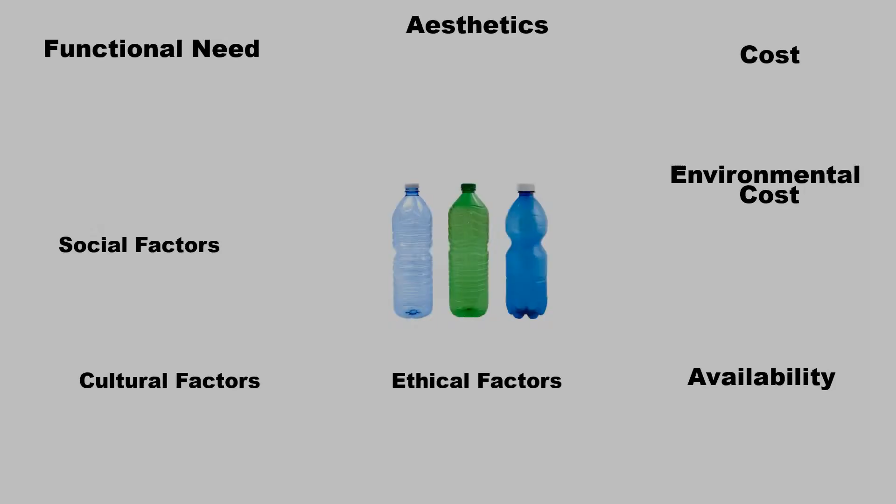PET, or polyethylene terephthalate, is used for making most plastic bottles. Functional need. PET is tough and durable, lightweight, and transportable, food safe, impermeable to water, and it is ideal for storing drinks that require high pressure, as well as those that do not.

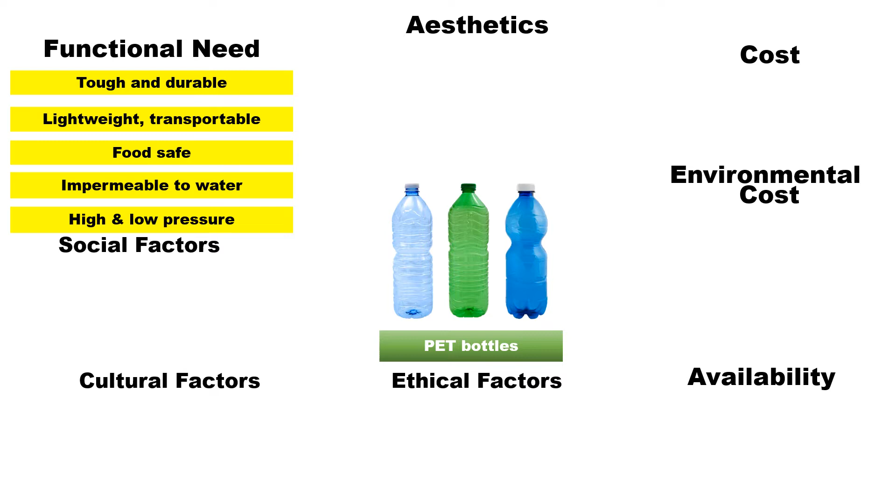Aesthetics. PET bottles can be blow molded into different bottle forms. They display the name of the product well, and they are transparent and can be colored to make them attractive to the eye. Cost. PET bottles are cheap to make because of the mechanized nature of the blow molding process, which keeps costs down. Although blow molding keeps costs down, in many cases, a PET bottle costs more than the drink they contain.

Environmental cost. PET bottles are recyclable, but many end up in landfill, and there is a high environmental cost because they contaminate water supplies as they release a substance known as leachate. Oceanic pollution leads to massive rubbish zones in oceans around the world. Plastic bottles and their tops are the third and fourth most collected plastics from the ocean. Availability. PET is available as granules, pellets, flakes, sheets.

Ethical factors. Polyethylene terephthalate bottles should be recycled to prevent oceanic pollution and leachate from landfill. PET bottles are made from crude oil, a finite resource that isn't likely to last for future generations. Social factors. Consumers use PET bottles for leisure and hydration. Bottled water is a modern phenomenon which is socially accepted.

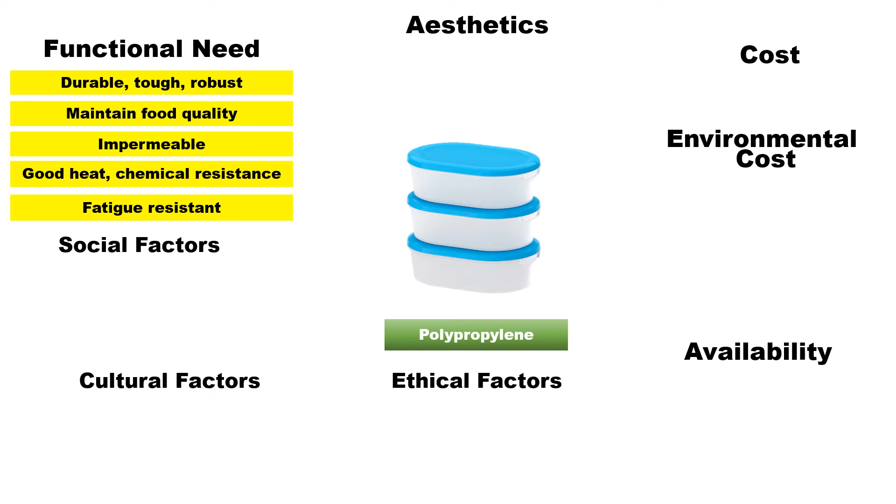Aesthetics. PP can be rough or smooth. It can be transparent or frosted. Color can be added to give it an attractive look. Cost. PP is cheap to manufacture. Environmental cost. PP can be recycled, but if disposed of in a landfill, it can produce leachate, which leaks into water supplies causing damage to habitats and stunting the growth of wildlife. It can end up in the oceans causing pollution if it isn't recycled or reused.

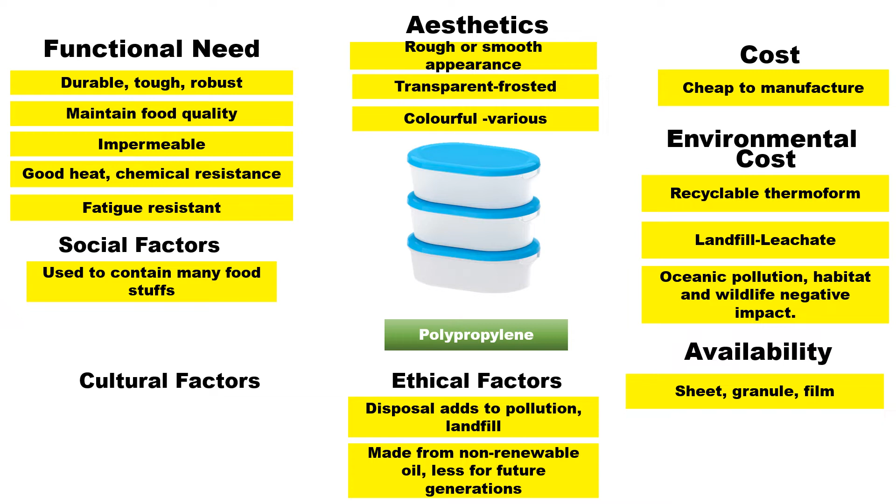Availability. PP is available in sheet, granule, pellets, powder and different sections of tubing. Ethical factors. Disposal of polypropylene adds to landfill. It is made from crude oil, which is a finite resource, and may not be available to future generations if it isn't managed. Social factors. PP is accepted socially as a food-safe polymer for storing food. Cultural factors. Unfortunately, using polypropylene contributes to the throwaway mindset.

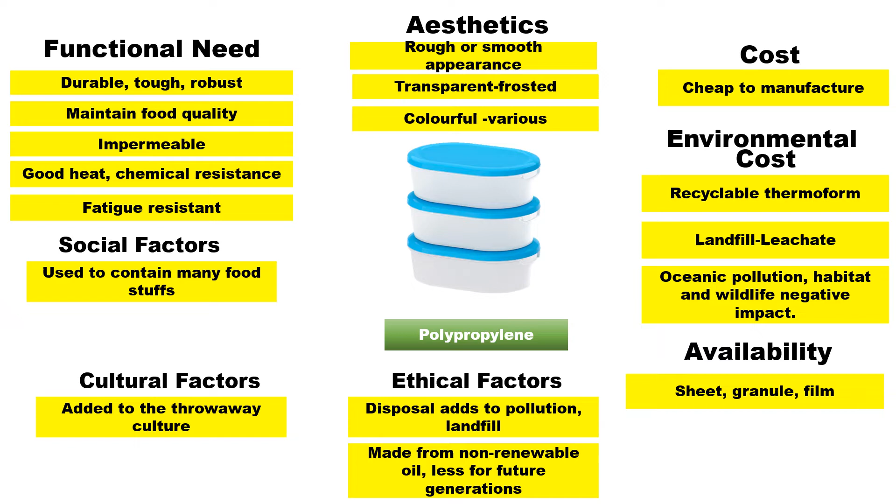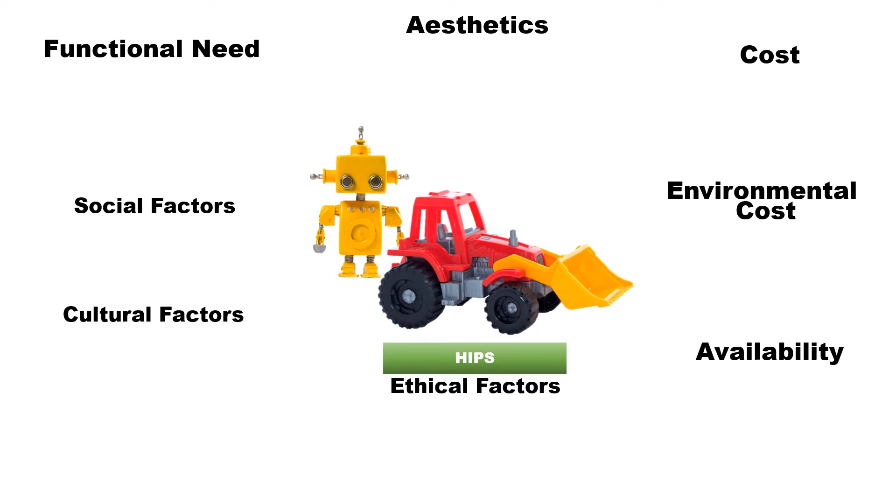Functional need. The selection of materials to make toys such as the robot and toy digger are wide and varied, but when it comes to selecting polymers, thermoforms are used. High-impact polystyrene, also known as HIPS, is a popular choice. It is tough, hard and rigid. It has good impact properties, and it is lightweight. Aesthetics. High-impact polystyrene is colorful, and pigments can be added. HIPS can be smooth or textured. It can be glossy, or have a matte finish.

Cost. HIPS is made from crude oil, which involves many processes before it is used to make a toy. This makes the initial cost higher than a timber-based toy. Toys made from polymers such as HIPS are cheap to make, especially when they are mass-produced. Bulk buying reduces the cost of the polymer.

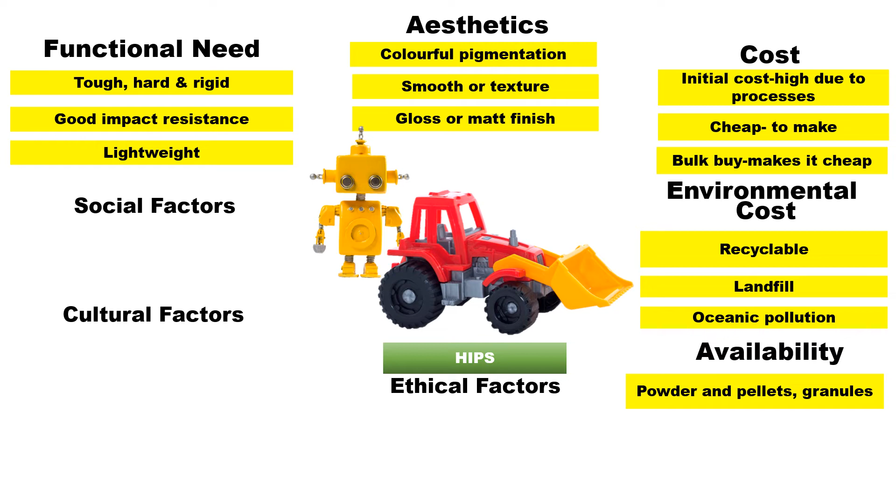Environmental cost. High-impact polystyrene is recyclable, and so it lessens the impact on the environment. A large amount of thermoforms are thrown away into landfill. This includes HIPS. Disposal of HIPS can add to oceanic pollution. Availability. HIPS is available in many forms including powder and pellets. Ethical factors. The use of HIPS leaves less crude oil for future generations.

Cultural factors. Character merchandising and mascots from films and sports events are possible because of the use of polymers such as HIPS. Breakfast cereal companies use free toys and collectible items to entice young consumers to be repeat buyers and to create brand loyalty. Social factors. Consumers are used to toys being made from polymers, such as high-impact polystyrene.

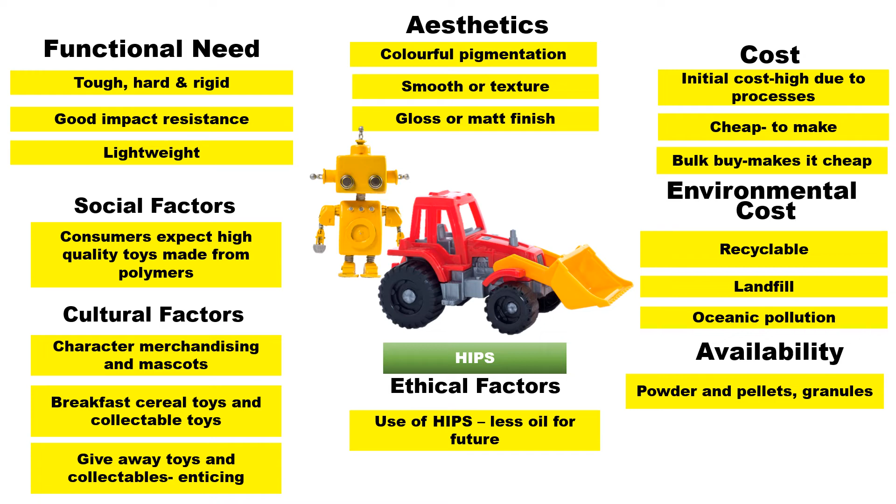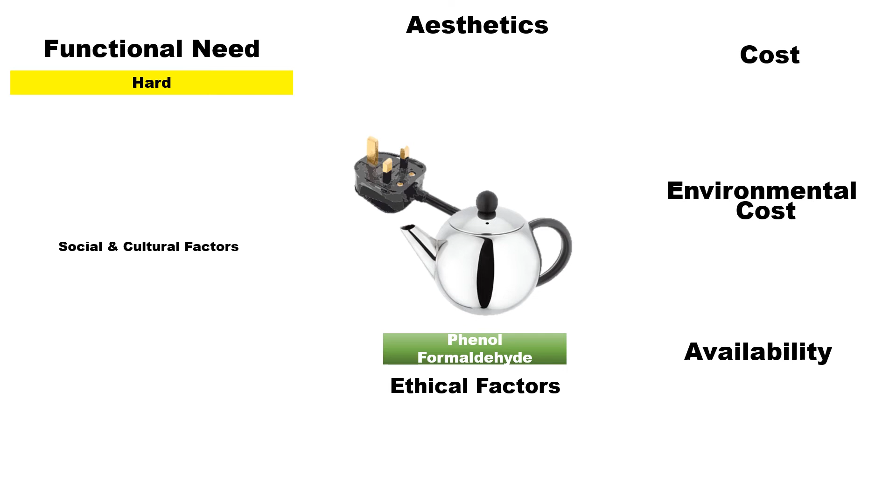Phenol formaldehyde, or PF, is a thermosetting polymer that is used for electrical and heat-insulating applications, such as handles for kitchen utensils like pots, pans, and electrical plugs. Functional needs. Phenol formaldehyde, or PF, is hard, heat and chemically resistant, and has good electrical resistance. Aesthetics. PF has a matte or gloss finish. It can be smooth to touch or rough. PF has limited colors and is usually black.

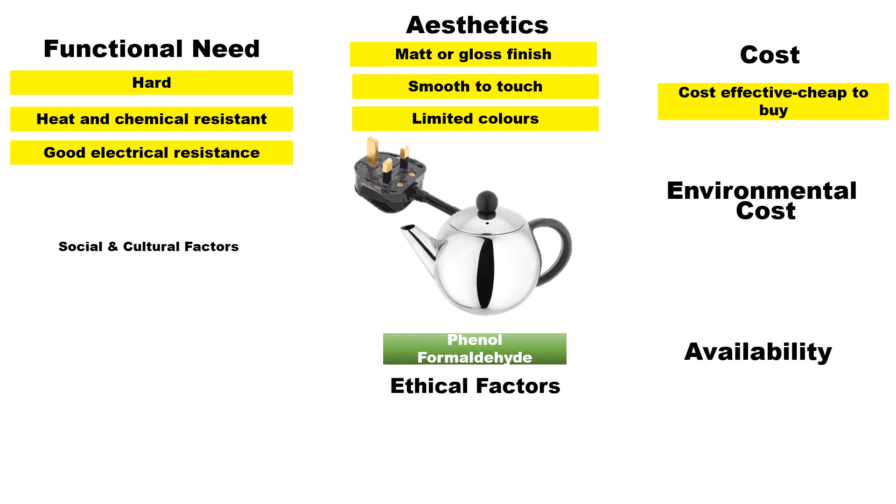Cost. It is cost-effective and cheap to buy because it lasts a long time. Environmental cost. Thermosets are hard to recycle, but the environmental cost is less because most phenol formaldehyde products last a long time. PF is biodegradable, and so at the end of life, products with PF components can be broken down through this process. Availability. PF is available as a resin and in the form of glue or adhesives. Ethical factors. PF is a thermoset that is sourced from crude oil, which is unsustainable. Because thermosets have a longer life cycle, this fact reduces the impact on the environment. Social and cultural factors. It is accepted that cookware uses thermoset handles.

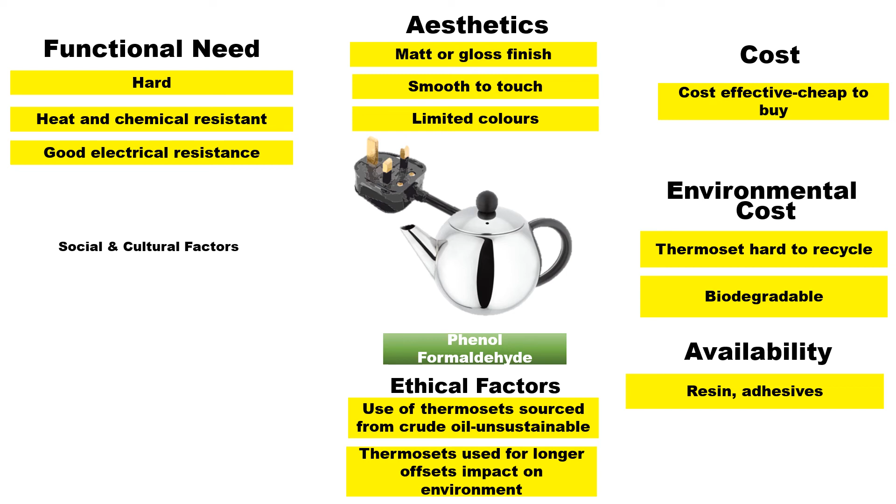Urea formaldehyde, or UF, is a thermoset polymer that is used as a resin for preserving dead animals and plants. But it can be used to make electrical fittings such as wall sockets and switches, buttons and handles. Functional needs. Hard, stiff, excellent heat resistance and an outstanding electrical insulator. Aesthetics. UF is very smooth, glossy in appearance and is white in color.

Cost. UF can be injection molded. So, the high mechanization of the process reduces the costs. Bulk buying UF reduces the cost to the manufacturer. These cost savings are passed on to consumers. Environmental costs. UF lasts a long time in landfill. It is hard to recycle. Availability. UF is supplied in granular forms ready for compression and injection molding. It can also be obtained as an adhesive or glue.

Ethical factors. UF is sourced from crude oil, which can pollute the environment, and it is a finite resource. Thermosets last a long time, and so this reduces the negative impact on the environment. Social and cultural factors. Historically, it is accepted in modern societies that UF is used to make electrical fittings.